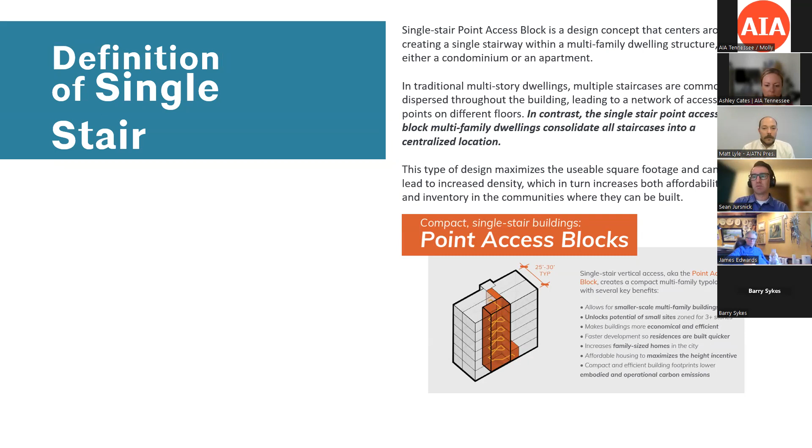And essentially, single stair housing is a floor plan or building that has units clustered around a central circulation core. It's often a stair combined with an elevator in new projects in the US where it's being built. It's often the combination of stair and elevator, and not a walk-up, but walk-ups are also common and they're not unusual. And it's a floor plan that's really dense and compact and efficient. And that's all it really is. So next I'll dive into more details on it and kind of our housing options today that we have. So next slide, please.

So right now in the US, in most jurisdictions, if you're using the base IBC code, you just have a few basic building blocks that you can work with. If you're building at a height of 3 stories or lower, you can build with single stair. And the IBC limits those projects to 4 units per floor clustered around the central stair. So it's something that we're already building and is common across the US today. Those projects often fit on small sites, have small footprints, but if you want to build taller than 3 stories, the IBC requires that you have 2 means of egress.

And so for taller projects, the floor plate needs to increase in size to accommodate multiple stair cores and a corridor that connects the two. And that results in either a single loaded corridor, which has a pretty inefficient floor plate as far as the net leasable area that you're building, when compared to a double loaded corridor, which is more common when building in the US today. When you're building above 3 stories, you usually see 2 stair cores with a corridor slicing through the middle and units on either side of that. And that building has a much wider footprint than the small single stair footprint that you see on the left.

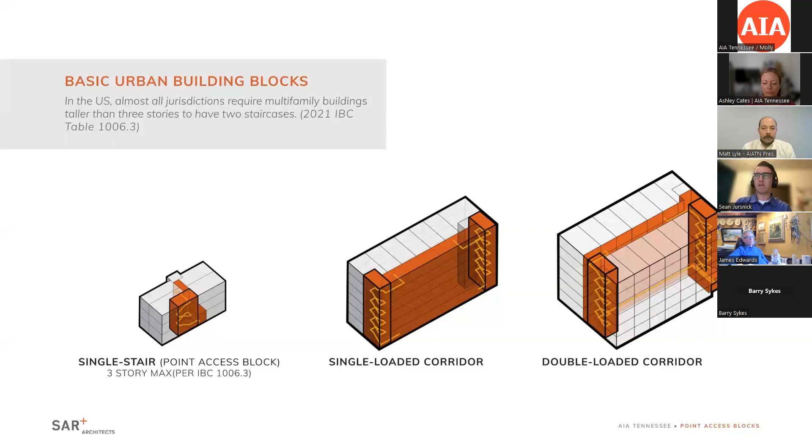They're along transit corridors. The city is envisioning that they'll grow and hoping that they'll grow and add density, but because they're small lots, it's impossible to add height to those lots because you'd need to add 2 stair cores, a corridor connecting them, and suddenly this small lot becomes extremely inefficient to build, and all the numbers on a project like that fall apart. So if you're able to build taller with single stair, suddenly the development opportunities start to get unlocked in areas where growth is already being encouraged in the city. Next slide, please.

So when you look at multifamily housing development in the rest of the world and floor plans in the rest of the world, double loaded corridors are actually very uncommon unless you're building dormitories or hotels. The more common floor plan in other countries is what you'll see on the left here, is units clustered around a circulation core and units that have aspects that have access to daylight and views on multiple sides, units that can cross ventilate, units that don't have extreme depths where parts of the unit don't see any daylight.

You'll see compact floor plans and a series of these single stair modules ganged up together when you have larger multifamily projects. In contrast, in the US, we use the wider double loaded corridor floor plan that you see on the right. And one thing that's interesting to point out when looking at these two diagrams of floor plates next to each other, both these floor plans provide an equal number of bedrooms. So the project on the left, in addition to providing the same number of bedrooms, can also now provide more green space on the lot when compared to building a wide double-loaded corridor building.

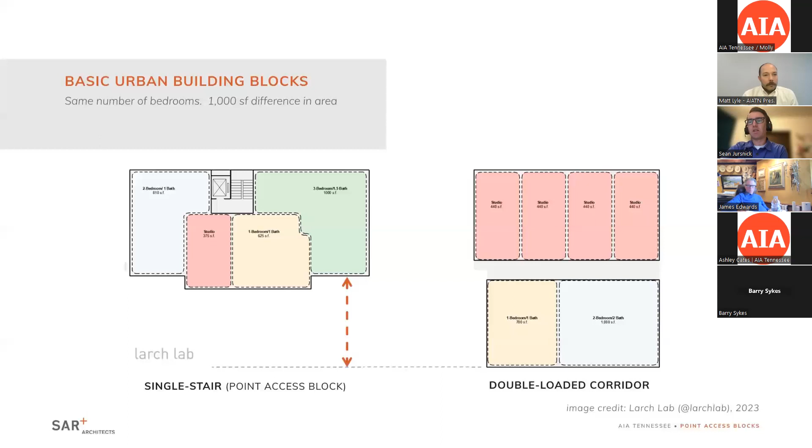So the project on the left, the units that span full depth will put their active spaces, their living rooms, on the street side, and then put their bedrooms on the courtyard facing side. So units can open windows at night, cross ventilate the unit as you sleep, and then bedrooms facing the courtyard just have a quiet evening's sleep, in contrast to a double loaded corridor that you see on the right, where half the units always face the street and they're not able to cross ventilate, and there's no respite from the activity and noise of being on the street.

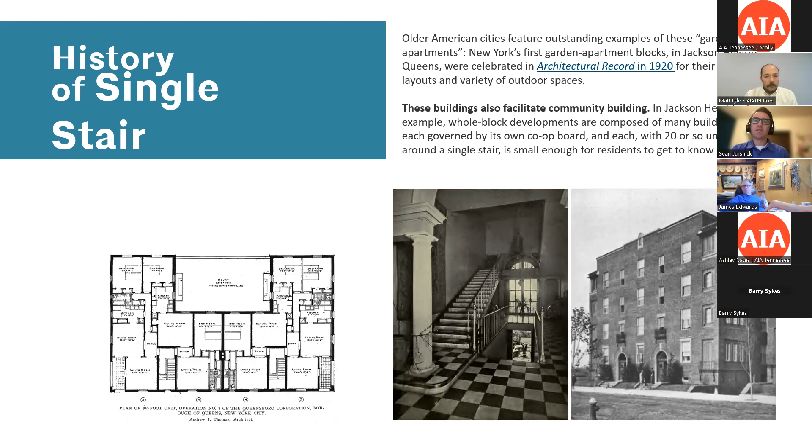And so there's two stairs you can see in the photo on the right, the two entries that residents would use to access the building and then walk up to their units. And then each unit had a side that faced the street and then a side that faced a small interior courtyard. So it's something that, you know, the US has done before and several cities have been doing for a long time, but it's uncommon today.

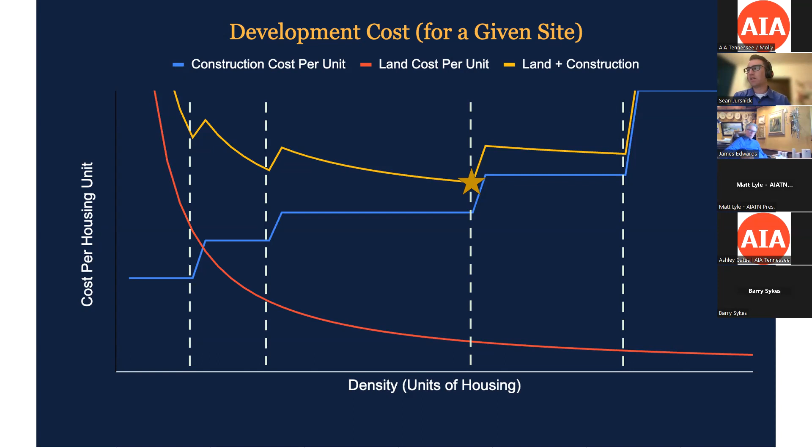Next slide, please. So just to reiterate a few of these benefits that I've been talking about of single stair buildings, they make smaller sites more viable by allowing for a missing middle housing type that doesn't exist right now. The units themselves improve access to daylight and ventilation. And then the dense development on small lots creates more walkable neighborhoods.

Once you're adding density to areas where development is already being encouraged, you're supporting transit networks, you're supporting opportunities for street level retail, and you're developing with a finer level of development instead of common development patterns where multiple lots would need to be bought up and combined and assembled to build a tall, dense development. You're creating infill opportunities on underutilized lots that don't exist right now.

So that's why where single stair is allowed, it's been successful, because developers have seen these opportunities and used single stair to build these kinds of great projects.

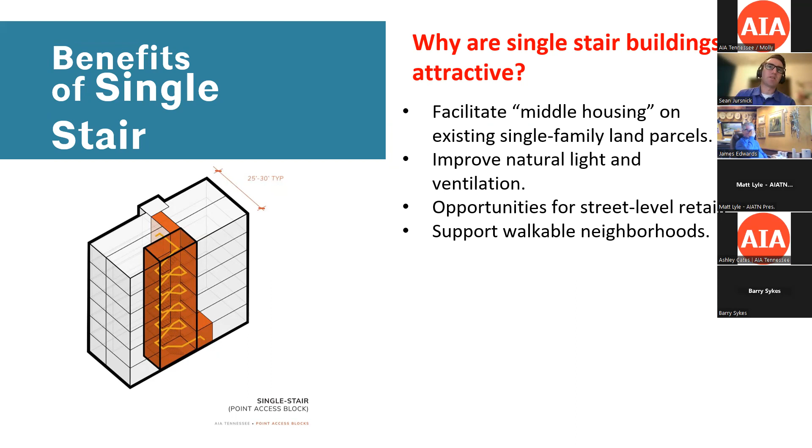So when comparing the US to the rest of the world, I've mentioned the building code outside the US. This is a chart that shows the single stair height restrictions in other countries. And the US is kind of down at the bottom of the chart. Canada actually is more restrictive in that the maximum height allowed in Canada is 2 stories with a single stair.

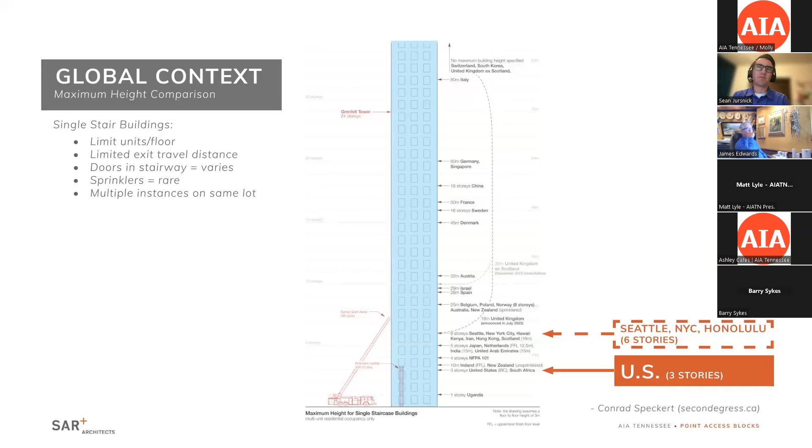And you can see in this chart, most countries allow taller single stair buildings, but most of them are mid-rise height. They're allowed at a height that corresponds with ladder reach, of the ladders reaching from fire trucks and fire apparatus. But there's a couple cities in the US that allow taller single stair buildings, namely Seattle, New York City, and Honolulu. The heights that they allow in those cities align with common heights that are allowed already around the globe. Next slide, please.

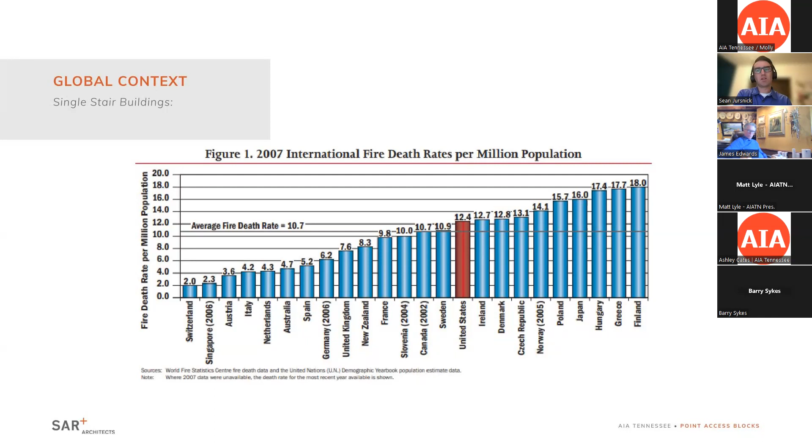So some of the strategies that different jurisdictions use for single stair housing, where it's used, is that they require short distances from units to exit stairs. So very short exiting distances. For example, in Seattle, the maximum corridor length you can have from a stair door to a unit door is 20 feet. Seattle also restricts the number of units per floor to 4 units.

New York City limits the square footage on a floor. So it's not as simple as simply just removing the second means of egress. Jurisdictions that use single stair egress do it by combining the single stair with multiple layers of fire safety. So it's important to note that it's not a double-loaded corridor building where you pull out a stair and then you're just left with a long dead-end corridor.

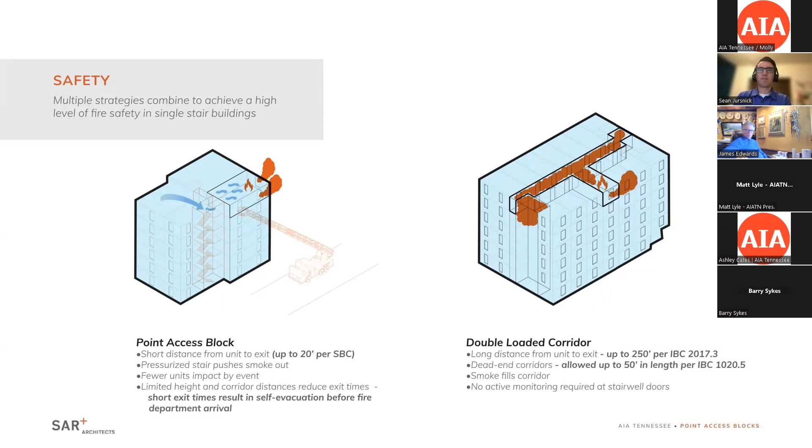The goal is to create a compact footprint with a very short exit time that allows people to quickly, safely get out of the building. Next slide, please.

And when talking about fire safety as well, I know Mark's going to go into more detail. Another item to note is that Seattle's building code and cities that allow single stair in the US and most countries around the world, they allow buildings that are much different than tragedies that you've heard of, like the Grenfell Tower in London. Seattle's building code is tailored to buildings that are a maximum of 6 stories in height.

And so buildings that would have a maximum of 20 units using the stair, that would require fire sprinklers, quick evacuation, and fire-resistant cladding. In contrast, the Grenfell Tower in London was a terrible tragedy, but it fundamentally is very different in that it had 24 stories, 120 units. It had no fire sprinklers, and residents were ordered to shelter in place for any fire or life safety events.

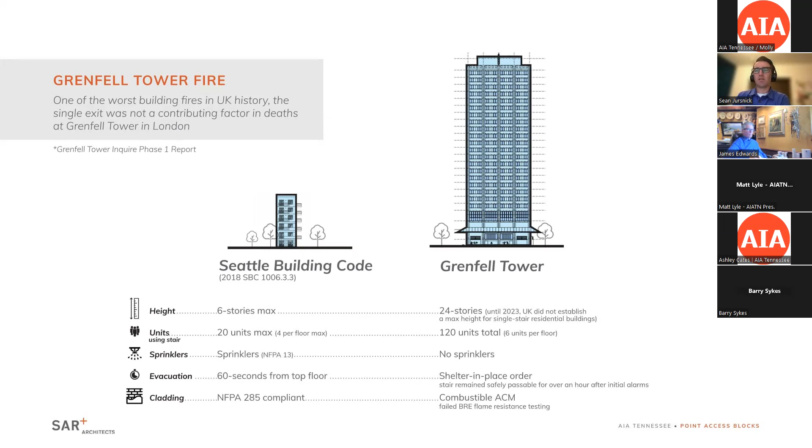And that's not the type of structure that's being talked about being allowed anywhere in the US right now, not even close to a project in that scale or that lenient in life safety standards. Next slide, please. So a lot of different states and cities have been discussing building code reform measures that would allow taller single stair buildings.

Like I mentioned, Seattle, New York, and Honolulu all already allow taller single stair buildings. Vermont actually allows 4-story single stair buildings because they don't use the IBC for their egress requirements. Vermont actually uses NFPA 101, which has a different single stair requirement and allows 4-story single stair housing. So if you visit Burlington, you can see they've built 4-story single stair projects in that city.

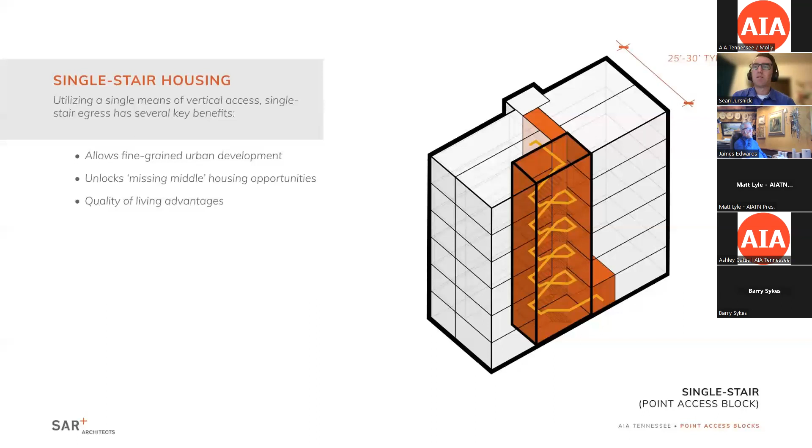So next, I'll kick it over to Mark, and we can start diving into what the building code approach looks like in a city that has used single stair development for decades, and how officials have approached the issue in that city.

Thanks, Sean. Just wait and see if I have control of the slides.

So we get a lot of questions here in Seattle about how we came to the decision to introduce single stair residential construction. So I'm going to try to cover most of the common questions today. Beginning with, when did the provisions come into the code? Why did we adopt them?

I think we'll go through some examples later that Trish and Ashley will cover that show some good examples of them. We don't really have a count of how many single stair buildings exist in Seattle, but we can show you some really good examples of buildings that have been built using these provisions.

I'll respond briefly to the question, what problems, if any, have we experienced from the single stair exceptions? And then the last thing I want to talk about, because the part that I left out of my bio, is I've spent 15 years as a fire chief as well. So I have fairly considerable experience in the fire service side of this.

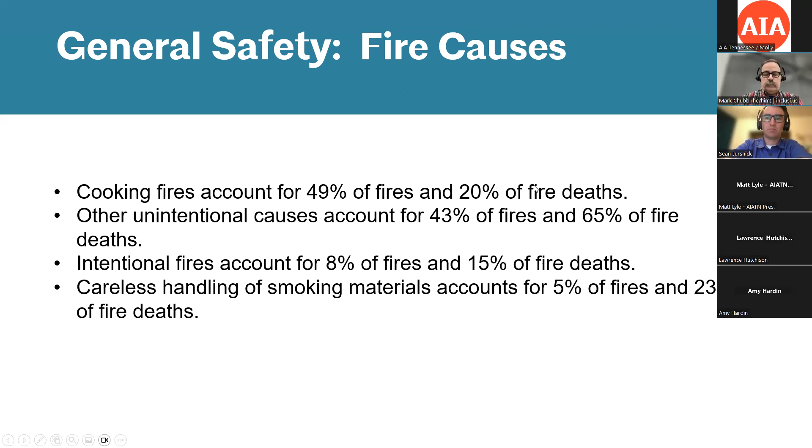So again, Seattle has some limits on the distance to the entrance to the exit from the dwelling unit. So most of the travel distance, most of the problem that we have to worry about is still in the dwelling unit where it's always been. And that's been true with double-loaded corridors and 2 exits, the same as it's true with single exits.

So the provision of a second exit beyond the dwelling unit does not significantly contribute to occupant safety, because occupants are generally not reliant on that second exit stairway if the fire is in their dwelling unit. The whole deal here is protecting people in the dwelling unit where the fire starts.

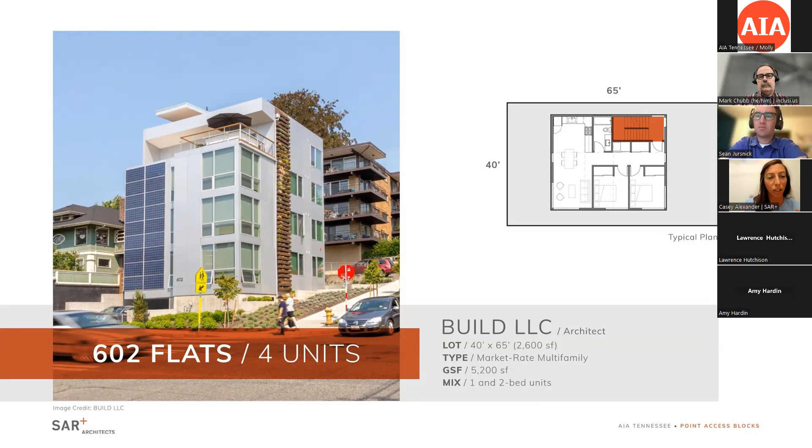And you will see a sample of these point access blocks in Seattle, organized from the smallest to largest in terms of number of units. Oh, there we go. As you can see here, the building is on the left, and then there's a detailed floor plan on the right with the site size. And this one in particular is a tiny lot. It's only 2,600 square feet, but it has 4 units. And each of these units are full floor, so cross ventilation and daylight is really prevalent.

This project has 6 units, and it's not all 1 bed or studios. We also have 2 beds and a 3-bedroom unit in this building, which is great for families who are usually left out of apartment buildings.

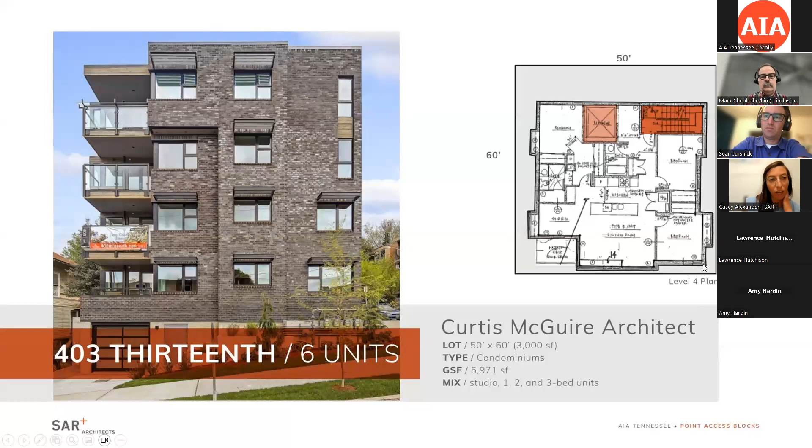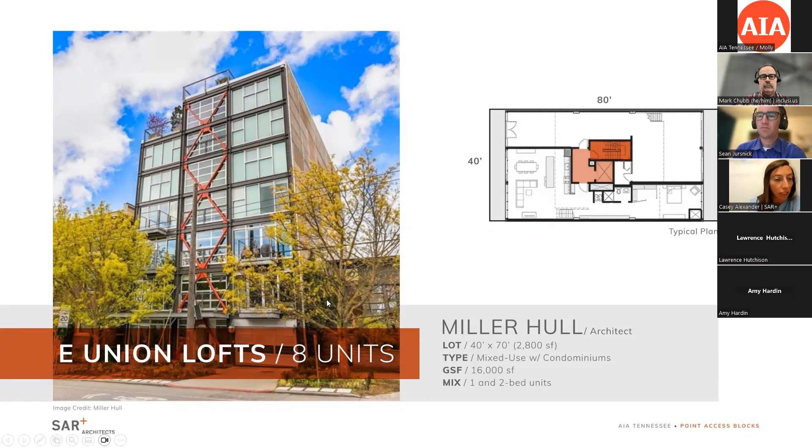You might recognize this project by Miller Hull. It's award-winning. It's really well designed. It's also on a tiny lot, only 2,800 square feet. It's 6 stories, and all the units are full depth, so cross ventilation is really easy, and daylight is really prevalent as well. And also, this is a mixed use project, so there is a hair salon on the first floor.

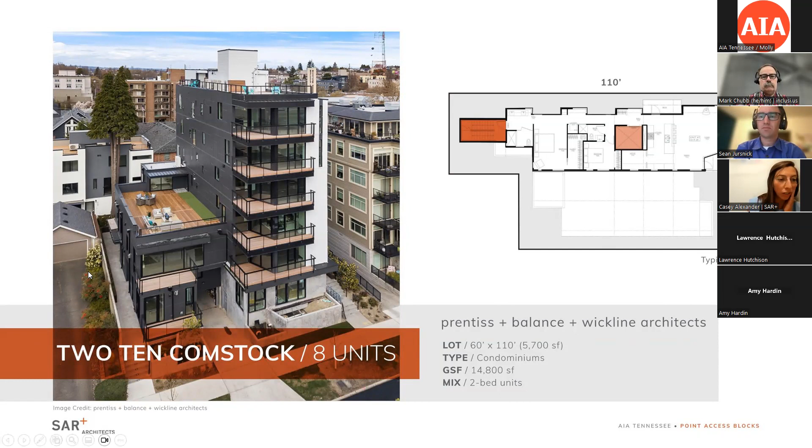This is a condo project. It's the tallest of the ones we're showing. Most of the units are full floor. The bottom units are split into 2. Even those have cross ventilation, as we've talked about. The neighbors also, you can see it's a single family neighbor and then a 5/1 apartment building. So it really does fit well into its context.

This is a really interesting project. If you can see in the front, this site preserved a 100-year-old family home and added 10 units on that same property. You can see in the plan, the stair divides the units, and so none of the units have shared walls, and you still get that cross ventilation because they take up the entire width of the building.

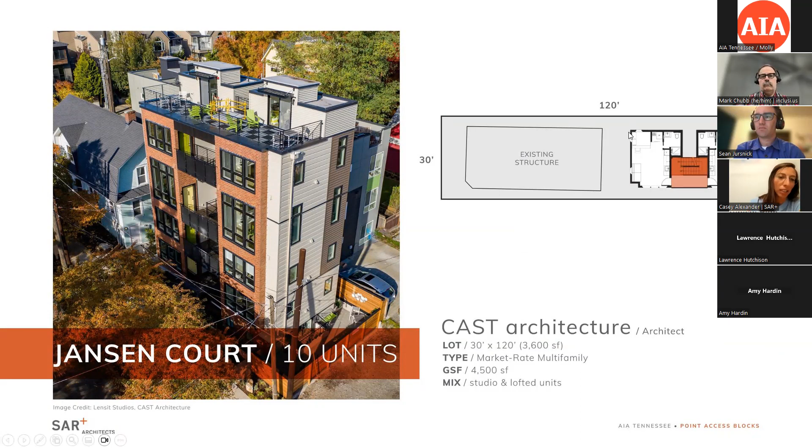This is a condo building. It's mixed use. There are several businesses on the ground floor, including a really great cafe. Above, the units are full depth. You can see here the living areas face the busier street, and the bedrooms are facing the quieter back of the building. And so it's just really well designed for the tenants.

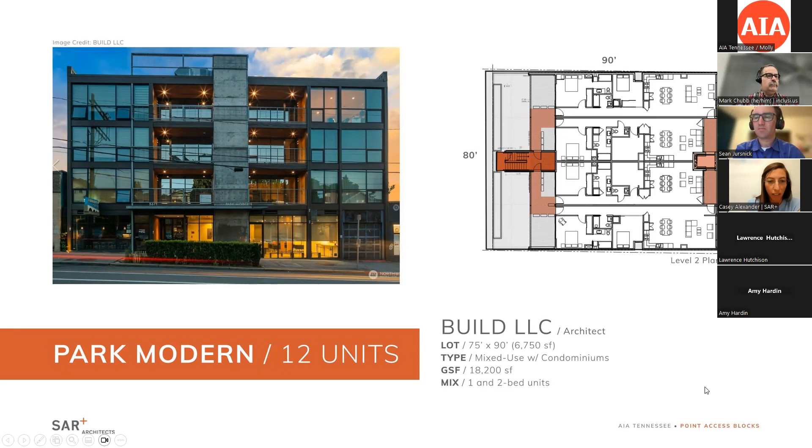Here's another project by Build. This firm initially did a lot of single family homes, and so as their firm grew, they were able to do some of these larger single stair projects to grow their business, which is way easier than jumping to a huge multifamily project.

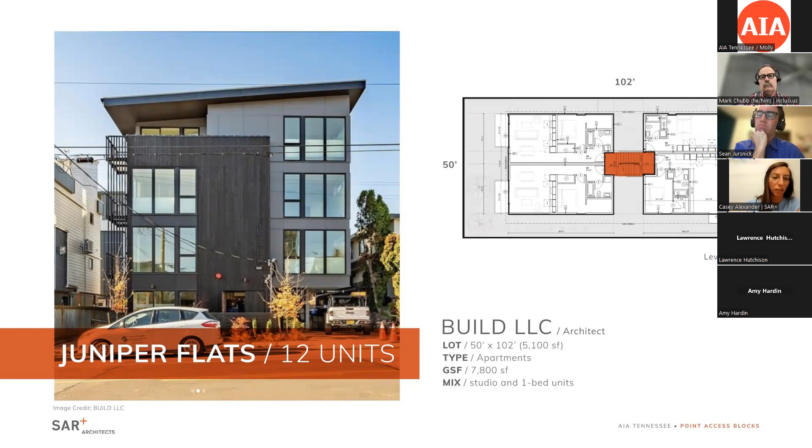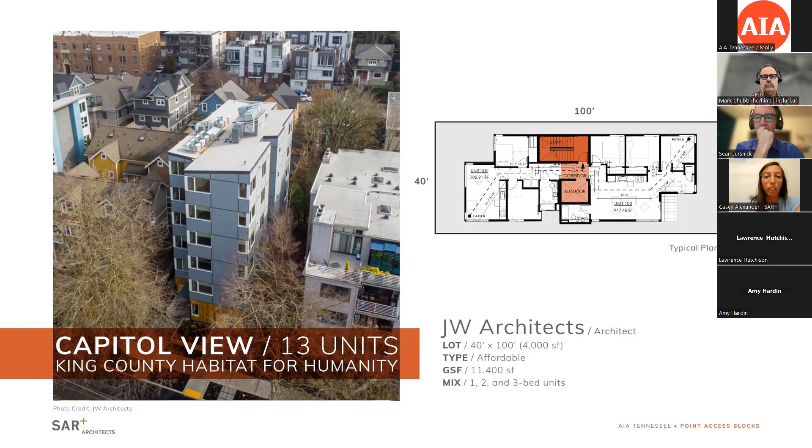This is a 5-story building with a basement. It's actually a Habitat for Humanity project that added 13 units for ownership, and it's been so successful that Habitat is already constructing another single stair in the same neighborhood within Seattle. And so this is maybe something that could happen in some of your cities as well. It's a really unique approach for Habitat.

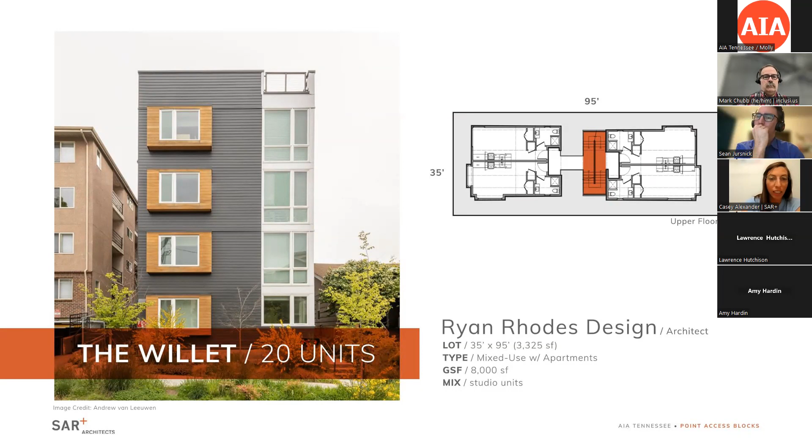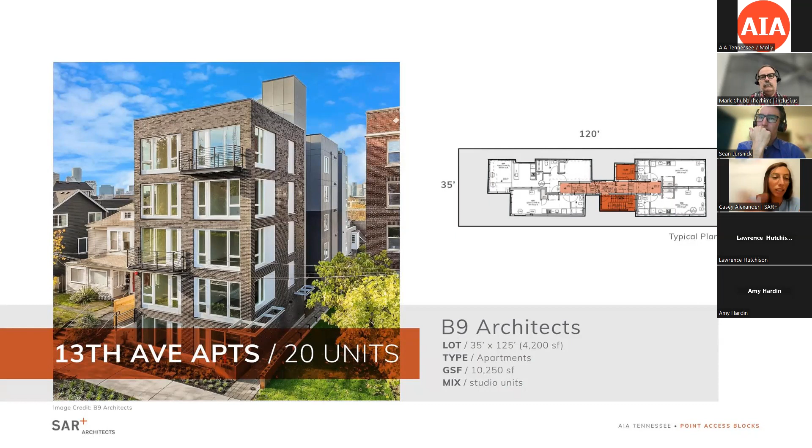This is a super narrow lot. It's only 35 feet wide, but it adds 20 units of housing, particularly student housing for this one. This is in the Seattle U District near the University of Washington. And similarly, this is another really narrow lot, 35 feet wide. You can see right next to it, the single family house is on a similar size lot. And the next one on the other side, there are apartments. So it does kind of fit into the context really well.

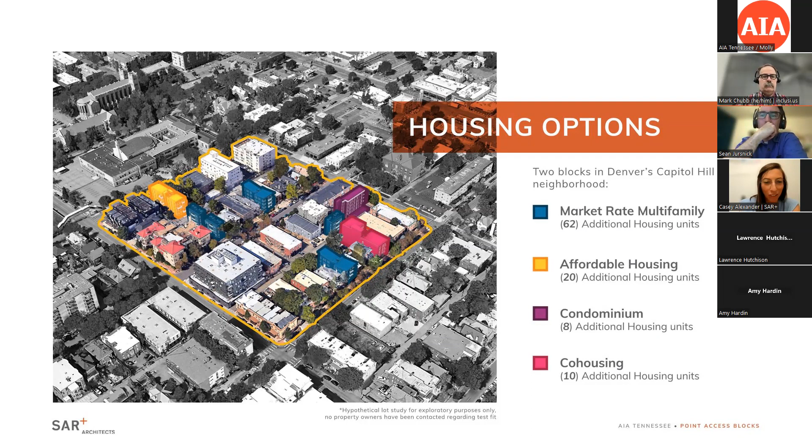Some of these projects are on parking lots, vacant lots, infill. Some are next to existing structures. And so it's just a totally different way to think about infill. And it might be a great way to look at these types of buildings in Tennessee. So I'll hand it off to Trisha now to talk more about the legislation that was passed.